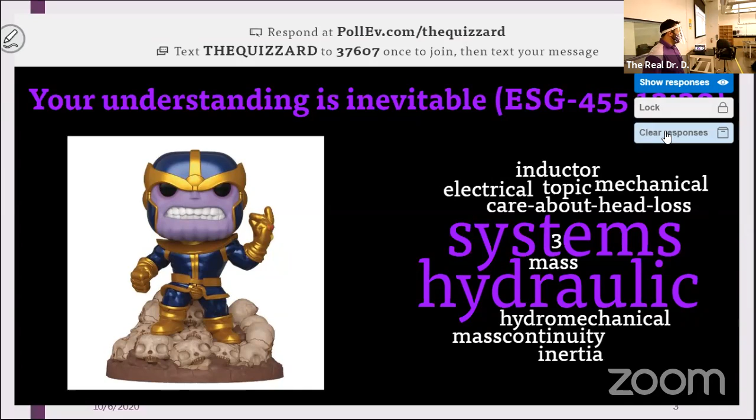Do I care about head loss? Isn't that just a change in pressure? Really, you want to talk about that? Isn't it just a change? Head loss is just how much pressure you're losing through your system - just a pressure drop. So yes, but I'm not going to call it that.

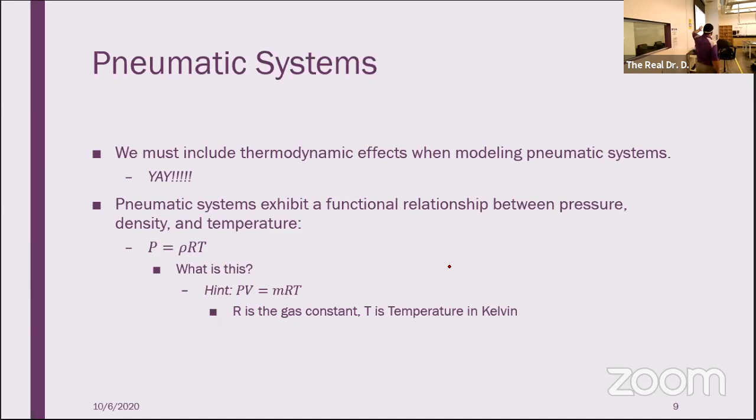Okay, so far so good. So we've got the ideal gas law, and that's going to come back and help us in a little bit. Not obviously apparent, but this is how we're going to get pressure in terms of density, or rather, our density in terms of our pressure. Because I told you before, we need to figure out what rho dot is actually in terms of something useful to us. And this is the road there, the ideal gas law.

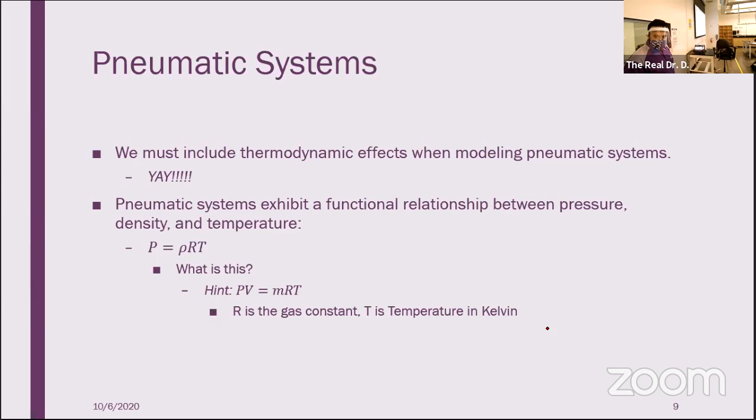So just like any other system, we have to talk about a resistance. When do we have a resistance element? The same places that we have them for hydraulic systems, specifically when we have a valve or an orifice. Now, in very rare cases, a flow of a pneumatic system can be considered incompressible, but this is going to be something that is an extremely low speed flow.

If we have a low speed flow, we can use these nice equations to deal with our resistance elements across our valves. And so we have m dot is equal to delta P over R sub L. Notice that looks a lot like our last one for hydraulic systems. Instead of being in terms of Q, it's in terms of m dot. Same deal for our turbulent.

So essentially, if this is an incompressible pneumatic system, we can treat it like an incompressible hydraulic system. Same operation. We have this, it's just that things are in terms of mass flow rate instead of Q dot. Notice we're writing all our equations in terms of m dot, because we need everything in terms of mass flow rate. The reason behind it is conservation of mass is our overarching law. If we plug these into the m dot CV equals m dot in minus m dot out equation, our job is to discern what is my mass flow rate in, what is my mass flow rate out, and what is being accumulated.

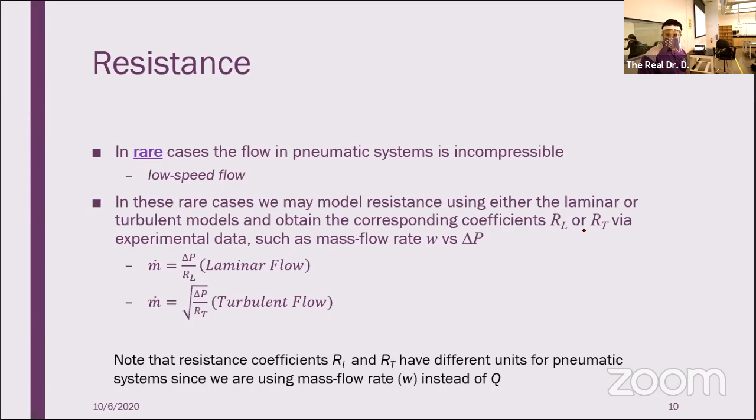So that's resistance for low speed incompressible pneumatic systems, but as it says here, that's rare and likely not the case. So how do we talk about systems we'll actually see? When we have something compressible and turbulent and complex, we need to consider choked versus unchoked flow at the minimum area, or at the throat.

So look at our picture down there - remember, that's just m dot. We've got some upstream pressure, some downstream pressure. Our m dot is moving from left to right. If we know our m dot is moving left to right, what can we assume about our pressures P1 and P2? Right, P1 is greater than P2.

It's also written there, but there's a reason. Remember, the pressure gradient drives our fluid flow. You have a larger pressure on one side, that pushes, and you lose pressure as you go across the throat, the orifice. So for unchoked flow, our mass flow rate is a function of P1, P2, the area of the throat, and temperature - the upstream temperature.

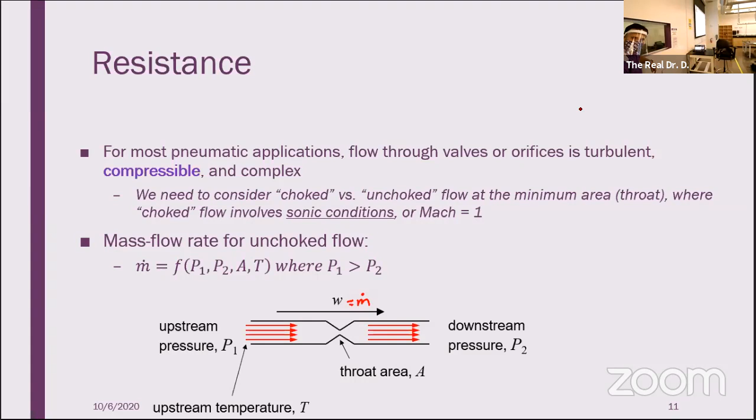That's a lot of things. So how do we - I mean, that's not just a function of the change in pressure. That's quite a bit. This is going to be complicated. So how do we go about doing this?

Well, we're going to use these equations. And they're gross, I know they're gross, but these are the ones we're going to use. So the mass flow rate - the top one is for not choked flow, or some people call it unchoked flow, and the bottom one is for choked flow.

There's a couple things we need to talk about here. First of all, C sub D - what is that? That's my drag coefficient, or discharge coefficient, whatever you want to call it. It's essentially a measure of how much friction we have in our system. Then the area of the throat times the upstream pressure.

What's gamma here? I'm not going to read this whole thing out, but what's gamma? Gamma is the ratio of specific heats - the ratio of my constant pressure specific heat to my constant volume specific heat. These are tabulated for us in a thermo textbook, table A1 or A2, which you all obviously have access to still, right?

No? So where would you find this? I think I brought this up earlier - there's this new thing, it's called Google, and you can type it in and find it. If you need one for an exam or something, good question, we'd provide one, or at least a table where you can find one. But here's my counter question: how many problems have you done thus far where you needed to put any numbers in? None. Thank you, Jeremy.

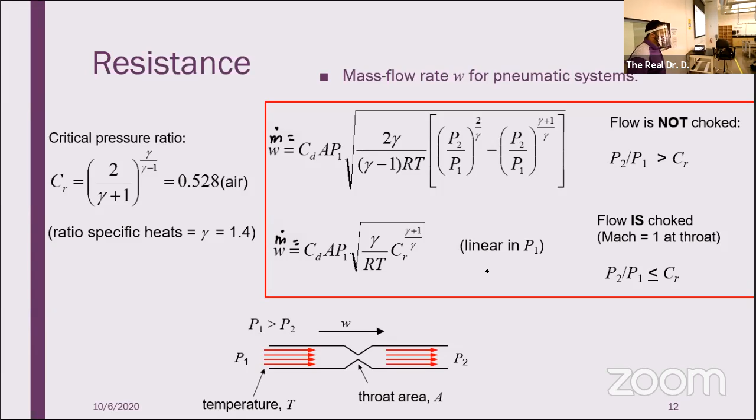Is it always appropriate to apply these? No, you don't always have to. Remember, we have things for low speed flows too, where the low speed flow will tell us that we can have either laminar or turbulent. So if you have something that's low speed, don't do this. It's not appropriate to use this on a low speed flow, but if we have something where you're expressly told that it's compressible, this is where we need to be. Do you guys have any questions on resistance?

For a compressible flow, yeah. If you have something that's incompressible, valves and things still have an effect, right? You can typically model a valve as an orifice or throat, but you need to know how far it's open, what is the area in there.

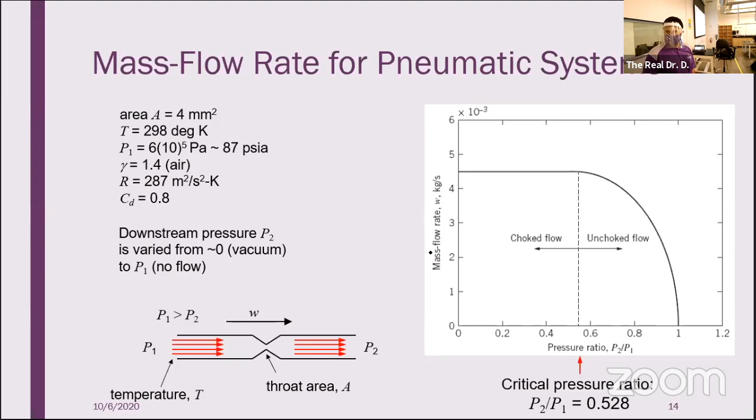All right, so let's talk about capacitance. We have pneumatic capacitance. We talked about this a little bit, right? We can define capacitance as the change dm over dp, the derivative of mass with respect to pressure.

But we know that mass is just density times volume, so we'll plug that in and massage the equation a little bit. We can find that dm is equal to d rho v, which is equal to v times d rho. So we can rewrite our capacitance as our volume times our change in density divided by the change in pressure.

Both concepts don't play here, but what does play is another thermodynamic concept. Essentially, we need to apply a polytropic expansion to this. What is a polytropic expansion? Great question.

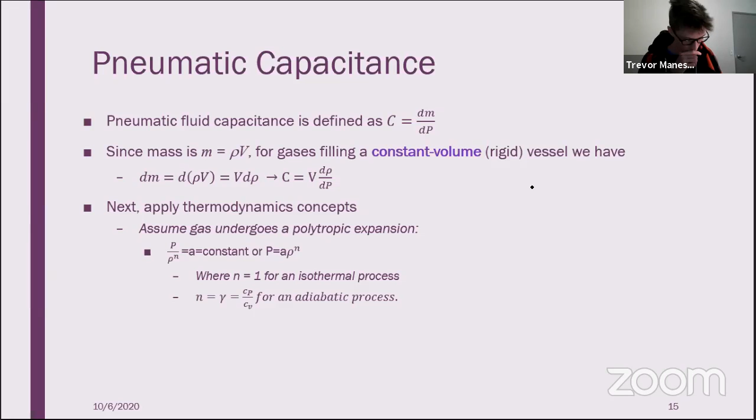All right, anyway, so we're gonna take what we know about the polytropic process and do some math. Specifically, we're gonna take the differential of both sides. Remember, P is equal to A times rho to the n. That is the equation we started with.

And we're going to take the differential of each side. If I do that, I'll get dP is equal to A n rho to the n minus 1 d rho. Then I do some algebra, so I get d rho dP. Why do I want d rho dP? Because that's what's in my capacitance equation, right? So I need to have that. I'm trying to get rid of d rho dP.

Because again, remember, as engineers, this is good practice for modeling and model making, and when we get into analytics of our models, we need to be able to measure something. If you're going to create a control system, if you're going to be controlling something using feedback, you need a measurement to come out of that. How do you reliably measure the change in density as a function of pressure? Wouldn't it be easier to just measure the volume and temperature as a function of the ideal gas constant and whatever polytropic process exponent you have?

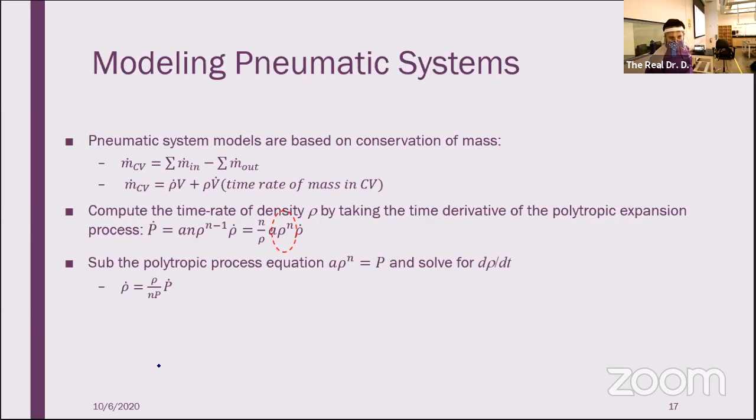Any questions on it? So what do we do? What's the point? Well, now I have an equation for P dot, right? I'm going to plug that back in, and I've got my conservation of mass.

Remember, W is M dot. So M dot inside of my control volume, the amount of mass that I'm accumulating inside of my control volume, is equal to V divided by nRT times P dot. Remember, that's C, right? This was, we just came up with this. This was C. That's C times P dot.

Plus P over RT times V dot, which we also came up with. So it's rho dot V plus rho V dot, and that's equal to my net mass flow rate, right? The sum of my mass flow rate in minus the sum of my mass flow rate out.

Yeah, so it's an M dot. I should, at some point, go back to these slides and change it, but I grabbed this one from the textbook, and I figured it'd be better to have you guys know that's what happens in the textbook in case you ever want to read the textbook, which I understand is high on everybody's priority list, for sure. Especially if you can't sleep.

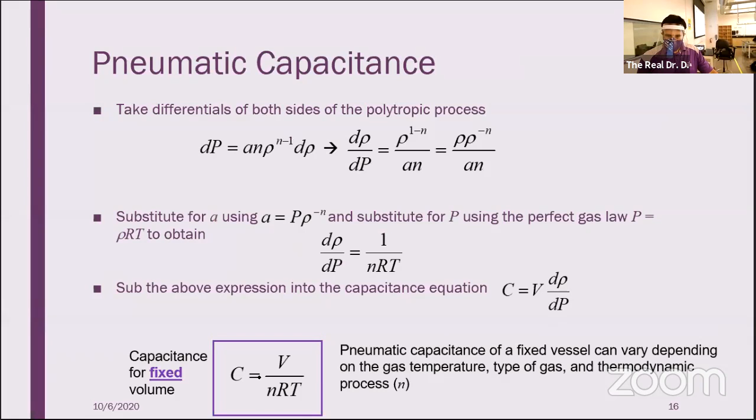Now, the other thing that we did a couple slides ago - I remember the C part. C is equal, right? So this coefficient here is actually C, which, if we think about this for a hydraulic system, we had C P dot was equal to M dot of CV, or Q of CV, right? For a hydraulic system.

That was for incompressible, right? Something that was incompressible. For a compressible fluid, we have the incompressible portion plus some extra - the compressible portion plus a little bit more. Okay, so there's that, right?

So what's this red box down here? Well, what happens? We have something similar to last class where we want to talk about a piston cylinder, right? A pneumatic mechanical system - which, I mean, we would never have engines and guns, ever - where gas is driving a mechanical output. This is something that I know never happened, but just in case it did, right?

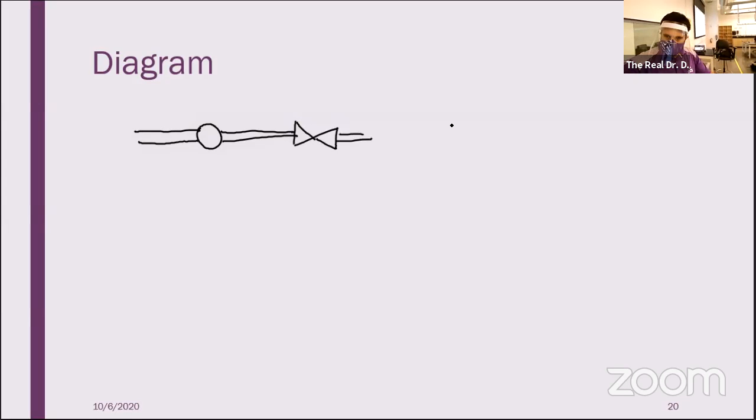The first thing we need here is a diagram. So I'm going to draw this pretty much exactly the way it was just drawn, except with the lines not being straight.

So I've got some pressure and some volume in here. I'm starting with this internal pressure here. I've got some temperature out here. I've got some atmospheric pressure there. We were told that this is R sub V. Also told that this is Q. And they call this QMI. I'm going to call it M dot I.

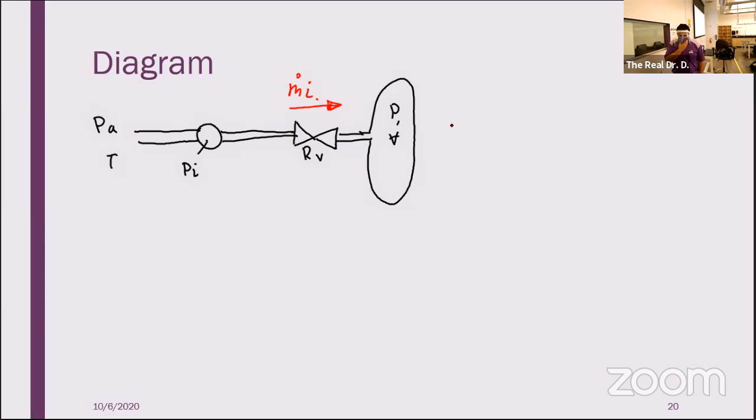Let's write that so that it actually is M dot I, my mass flow rate in. We need to draw a control volume. I'm going to use this tank.

Now, what were we told about QMI? The QMI is equal to a function of delta P. Now we don't know, it's experimentally derived, but they didn't give it. We also weren't told if this was a high speed, low speed, whatever flow, right? That seems problematic as well. Huh.

We'll talk about that in a second. What's my input and what's my output? What was that? Sorry, I can't hear. Okay.

So yes and no. If we're looking at this control volume, what are we putting into this control volume that we've drawn? M dot. Temperature? M dot I. It's the mass flow rate in. So you're not wrong, Olivia. It all depends on how much of the system that we have in our control volume specifically.

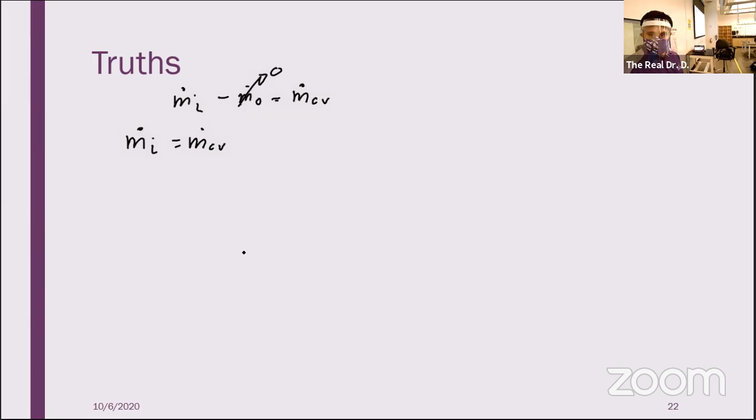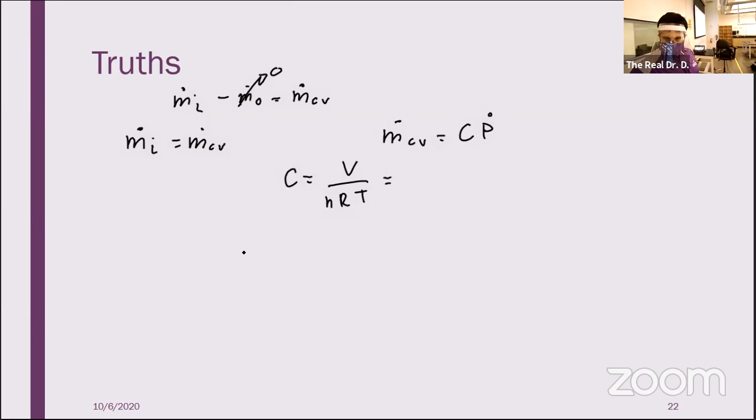Is equal to CP dot. Well, that's fun, right? We also know that C is equal to V over nRT. We derived that. But in this case, it's isothermal, so this is really V over RT, because as we said at the beginning of the problem, n is 1 for an isothermal expansion.

Okay. All right. So we can do our reduction. Where do we start our reduction here?

Well, we start with that m dot I is equal to m dot CV, right? Number, m dot I is equal to m dot CV. Well, that's just going to tell me that m dot I is equal to CV over RT, oh sorry, that's CP dot, I jumped a line, which is equal to V over RT P dot. So m dot I equal to V over RT times P dot.

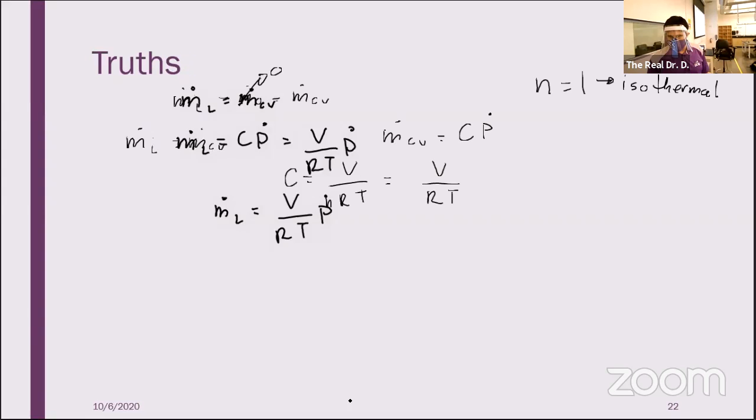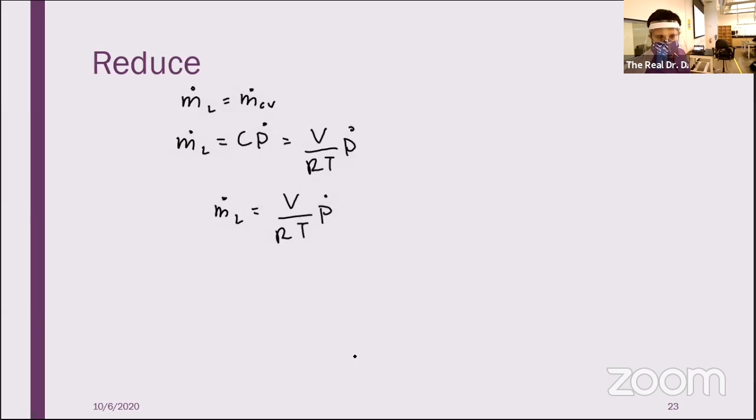So we'll go back, because we know that m dot I was equal to a function of delta P, which seems like it's unhelpful to start with, right? But this just becomes this. And there it is.

No fair, Dr. D, you picked the easy one, right? Yes and no. The only thing that makes this harder is if you have to determine choked or unchoked flow, and that's just us plugging in a different equation that we already have, right? That would be the only variation on this. Or, even easier, you're told that it's a low speed flow, so you don't even bother, you just use laminar and turbulent flow, right?

You guys have any questions on this one? Do you guys feel comfortable with some of this? Are we starting to get a little bit of this under our belts and feel a little better? Connor, go. Yes.

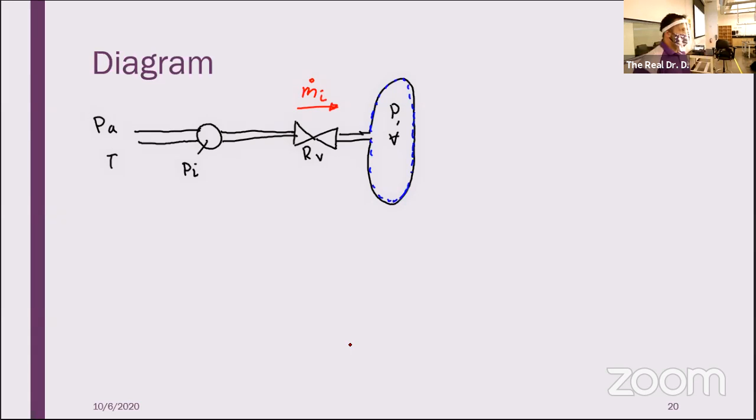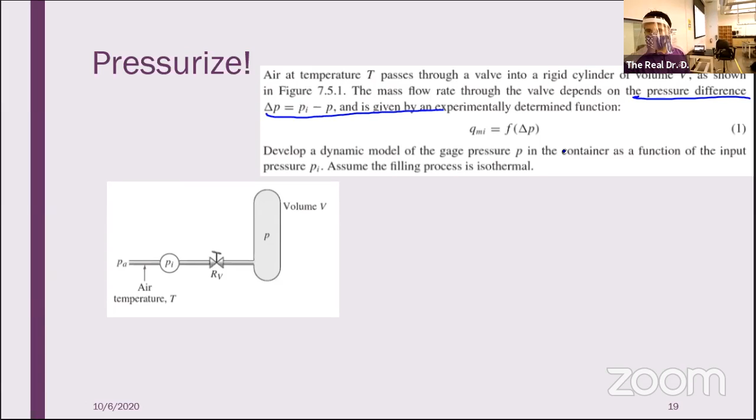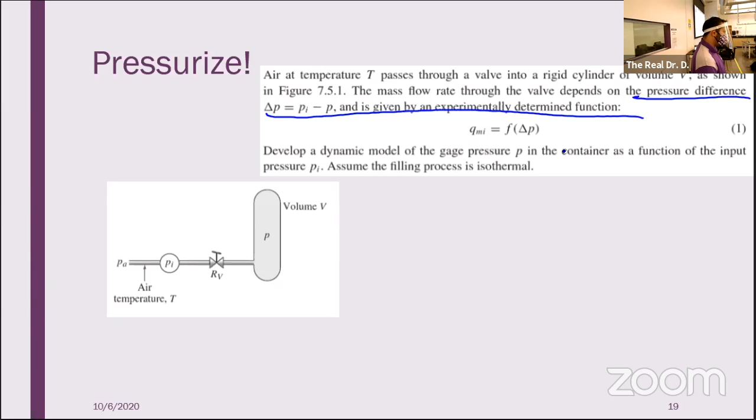Yeah. So if you go back, this is the pressure difference. Yeah. Sure.

So it comes in as that function of, remember, what is delta P? So the question was, how do we get this in terms of PI? Remember, delta P equal to PI minus P. So this is just a function of PI minus P equals V over RT P dot. And we can't really do more than that as it is because we're not told what the function of is.

Now, again, if you picked laminar, and you ran with laminar, that is a function of delta P. Delta P would be PI minus P, and you go with that. Same deal with choked and unchoked - you would be able to get P1 and P2 from that, or PI and P2. We're leaving it super general though, because you can't just assume what it is from the way that the problem's written.

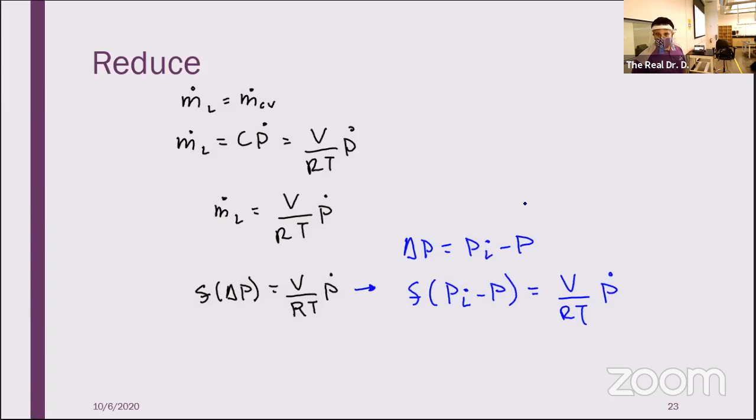All right, so let's talk about thermal systems. So with thermal systems, remember we define thermal systems as systems where temperature is a dynamic variable and we are typically interested in adding or removing heat from something. As such, instead of using conservation of mass, we're going to use conservation of energy.

So in the case of having an open thermal system, we've got some boundary that encloses our thermal capacitance. We've got heat energy that can enter and leave due to heat flow, due to heat transfer, Q. But we also have heat energy that can enter and leave due to mass transfer.

What is that? Well, remember from thermo - this is going to be very thermodynamics right now. Because remember from thermodynamics, when you have a fluid enter, it carries with it some enthalpy. And what is enthalpy? Enthalpy is mass times the specific heat times the temperature. So if we were to cut up our fluid into tiny little pieces, and we had to push that through a pipe, that's going to require some amount of energy to do so. That amount of energy is known as the enthalpy. And so we have to take into account the change in enthalpy for this.

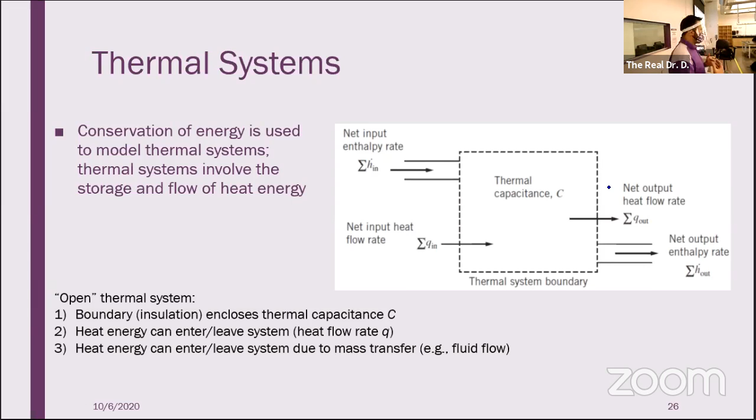So what does that look like? Well, if we apply the first law of thermodynamics, expressed as time derivatives, we get the net rate of heat energy stored, the rate of change of storage with respect to time, is equal to the sum of all my enthalpy in minus the sum of my enthalpy out plus the sum of my heat transfer in minus the sum of my heat transfer out. And this would give me units of watts or power.

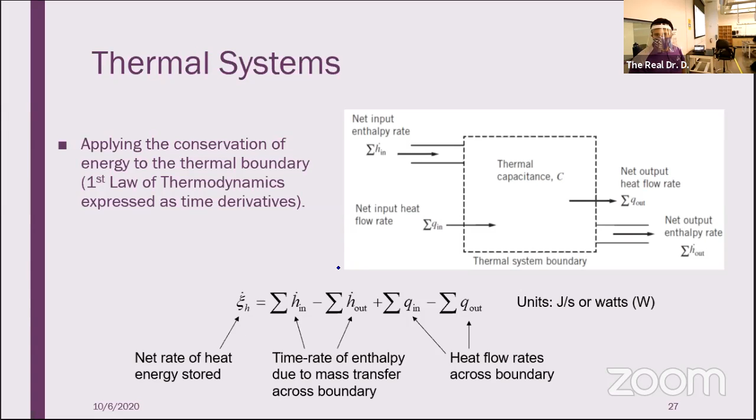In general, thermal systems are distributed. What does this mean? Well, in this room right now, we cannot consider the temperature uniform. If it says it's 72 degrees, that doesn't mean the whole room is actually 72 degrees. It's going to be hotter in some parts, colder in others.

Here's another example. I have a metal rod and I ask you to hold one end of it, and I heat up the end that I'm standing by. Eventually, it will get hot by your hand. Might take a long time, might not, depends on what metal you're holding, but eventually it'll get hot. The entire temperature of the bar is going to change according to the length. There's some temperature gradient.

Because we're talking about distributed systems, that means we need to model everything as PDEs instead of ODEs.

What did I say on day one about doing PDEs? I said no, we're not going to do PDEs. So what do we do? We just pretend they're regular ODEs, one for one. So we're going to assume that every point on an object, every point within a fluid has the same temperature, but it is an average of the temperature gradient.

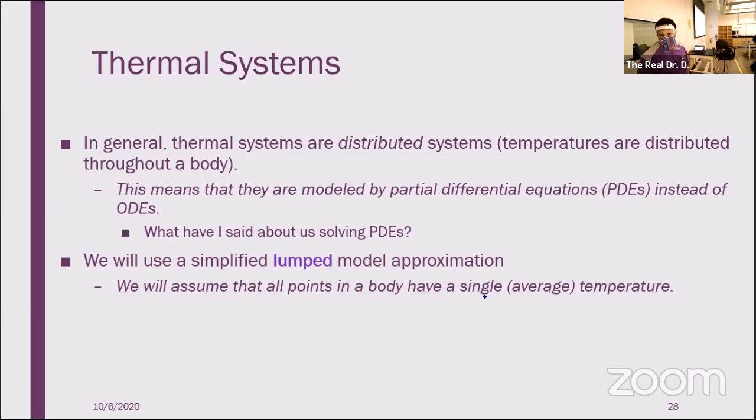We're going to be able to characterize thermal systems as two passive elements: we have resistance and capacitance. Again, we're not going to talk about inertance or inductance for this. We have resistance and we have capacitance.

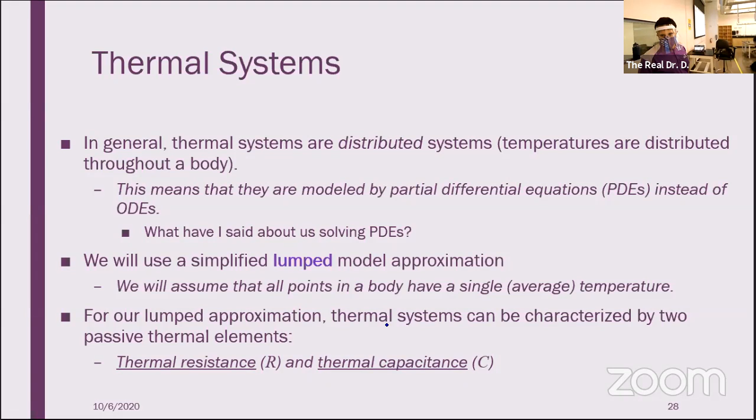Let's talk about them. Thermal resistance. What element in electrical, mechanical, and fluid systems would thermal resistance be equivalent to? Yeah, a resistor, right? Resistance is going to be resistance in fluids, it's going to be a resistor in electrical systems, it's going to be a damper in mechanical systems.

In our case, we've got three types of heat transfer that we're going to cover: conduction, convection, and radiation. And if we don't remember those, I'm going to have a long talk with Dr. Williams and Professor Tan, because that's the bare bones minimum you should have gotten out of that class. So: conduction, convection, and radiation.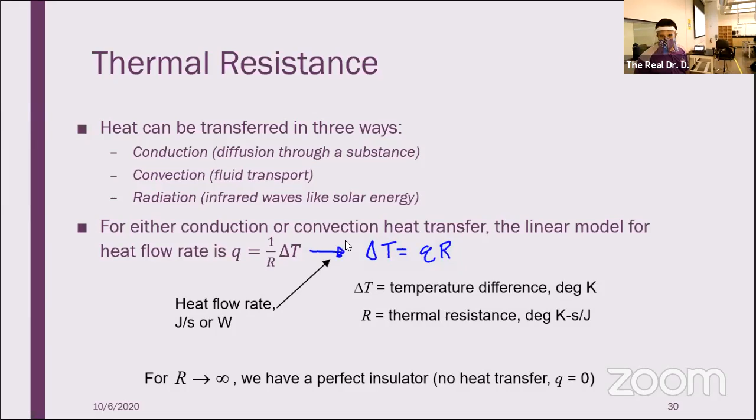For conduction, we define R as X over KA, where X is the thickness of my material, my segment. K is my thermal conductivity coefficient, and A is the cross-sectional area that I'm dealing with.

So K is a material property. For example, copper has a K value that's 18 times greater than stainless steel. So copper is a good conductor and a poor insulator. You want to be warm at night, right? You shouldn't put copper in your walls. It's not a good idea. You're just asking for trouble, really.

All right, so conduction, remember, conduction is when two things are touching. If heat transfers from things being in contact with one another, that is what conduction is. Convection, on the other hand, is when we have a fluid blowing over a surface, or two fluids passing each other.

Our convection resistance is defined as 1 over H times A. Sometimes we see that as lowercase h, which is our convection coefficient. Convection coefficient is derived experimentally, just like many of the other things that we deal with in transport and thermal. It's an empirical solution.

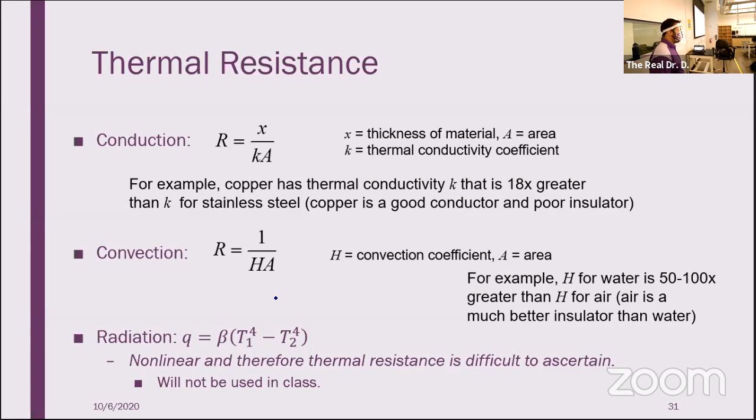All right, thermal capacitance. Thermal capacitance is the measure of a body's ability to store heat due to its mass and its thermal properties. So how much heat energy can something store? That is what our capacitance is.

We actually talked about this, well not you and I, but us as a whole, when we were in thermal, because there is a measure of this. It's the mass times the constant pressure specific heat. That is my capacitance. So how much of the material do I have, and how much energy can that material store?

For example, 1 kilogram of water has more than 4 times the thermal capacitance of 1 kilogram of air. So water can store more energy than air. Another way of thinking about it is it takes more energy to make water do something.

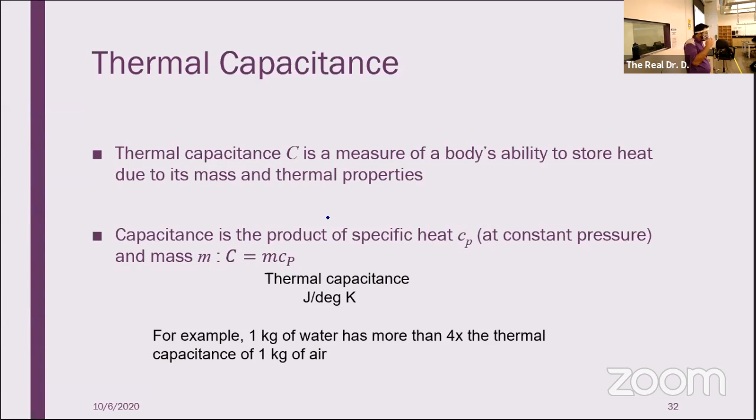Okay, so MCP, right, that's it. We've got MCP, and we've got Q equals 1 over R times delta T. But we really haven't discussed that much on how to model this. We know what the elements are, we understand what they do, but how do we actually put this into practice? The way that we're going to do that is this.

So for my lumped thermal model, we base it on a heat balance equation, which is essentially the first law of thermodynamics, but we're not incorporating any of our mechanical or electrical work here. So what do we have? We've got C dT equal to H dot net dt plus Q net dt, where H dot is equal to M dot Cp times T.

Okay, so the heat stored in the body is equal to the net heat transfer to the body, right? This is very much like M dot Cv equals M dot in minus M dot out. This is just saying that I have some energy being stored, something internal to the system, and that has to equal the amount of energy coming in minus the amount going out.

Where do we get these sources of energy from? Well, we've got C T dot, that is our capacitance term. How much energy am I storing in my material? Another way of saying this is the sum of H dot in minus the sum of H dot out, plus Q in minus Q out.

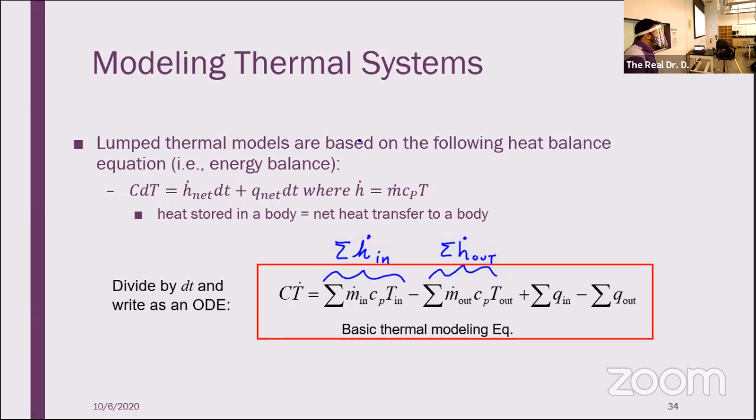What if I don't have a mass flow rate in or out? Those terms go away. What if I'm adiabatic? Admittedly, that's a really lame thermal problem, right? But if we have this equation, we can alter it based on our needs and based on what we know.

So let's try one. This is what I call a shell and tube heat exchanger, but the textbook I pulled it from calls a double pipe heat exchanger - same type of deal. We're going to use this to transfer heat from the hot fluid flowing through the tube to the surrounding cold fluid. So T1 is hotter than T2. We'll assume T2 is also hotter than the ambient temperature, TA, which isn't labeled here, but we should assume there is some ambient temperature surrounding it.

Both flows are steady, and therefore the input and output mass flow rates of the tube and shell are m.1 and m.2 respectively. We want to derive the mathematical model for the heat exchanger.

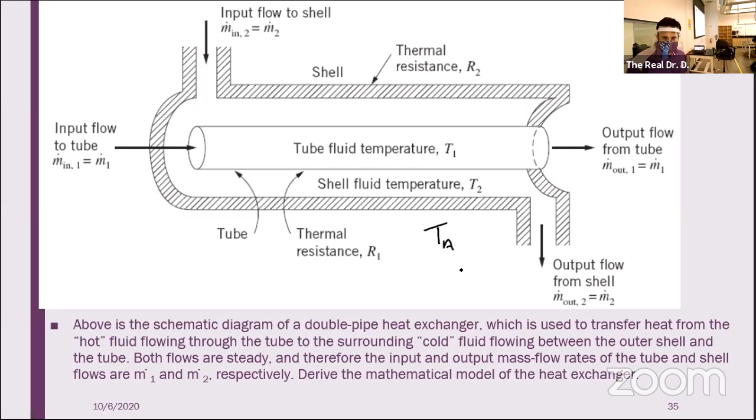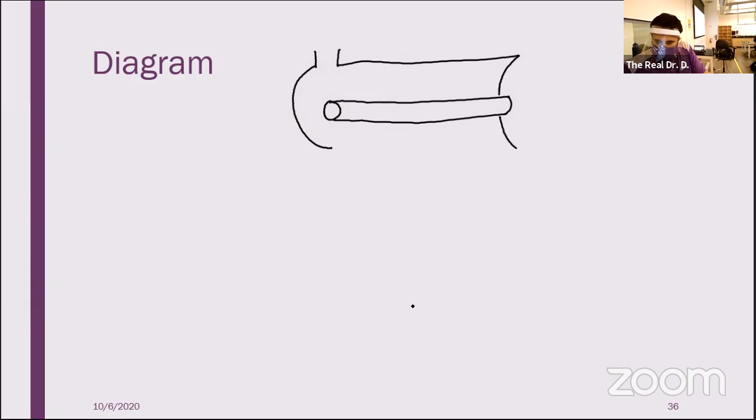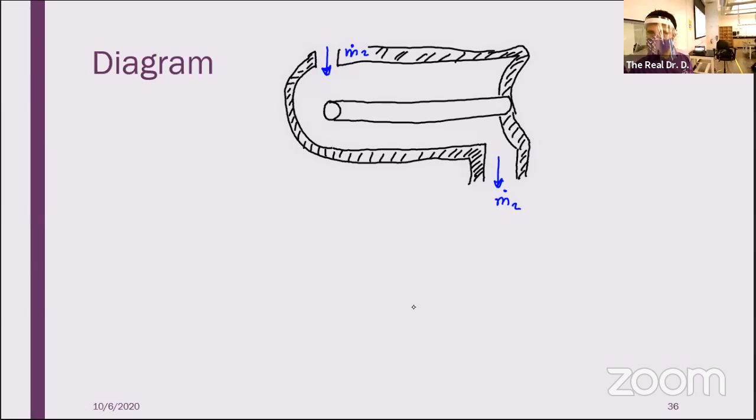So we need a diagram. I'm going to do the diagram two ways. The first one is going to look like this. I've got m.2 and m.2, and I've got m.1, m.1. I did that on purpose. The blue one signifies some colder temperature, which we're calling T2. The red one is T1.

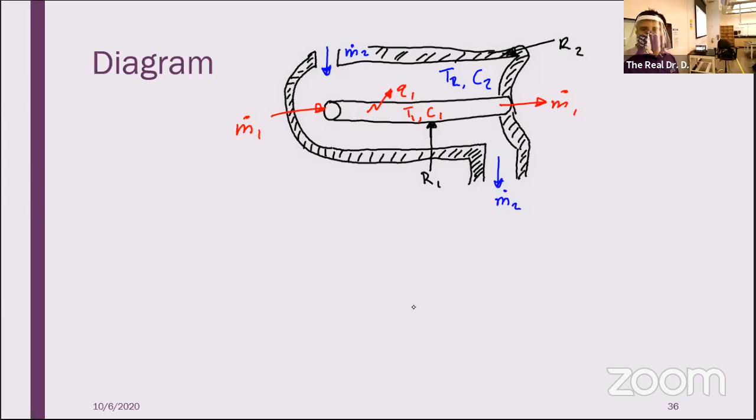The diagram also calls out the thermal resistance R1 and the thermal resistance R2. We've got some capacitance in here, C2, and some capacitance in here, C1. There's also heat transfer - call that Q1, from the hot pipe to the cold fluid. And I've got some heat transfer called Q2, from the cold pipe to the outside, because remember, I've assumed the ambient temperature is less than what the cold fluid is working at.

And that'll do it - that's a good one. But I told you I was going to do this two ways. The other way is I'm going to define my control volumes. I'm going to say this is my tube, and this is my shell. I'm going to define this as m.2, this is m.2, this is m.1, m.1.

I'm going to have Q1 across here, Q2 here. Remember, this wall has some R2, and this wall in here - these two things are connected - this is R1. Inside, I've got C1, T1, and C2, T2. Either one of these is fine and valid and used.

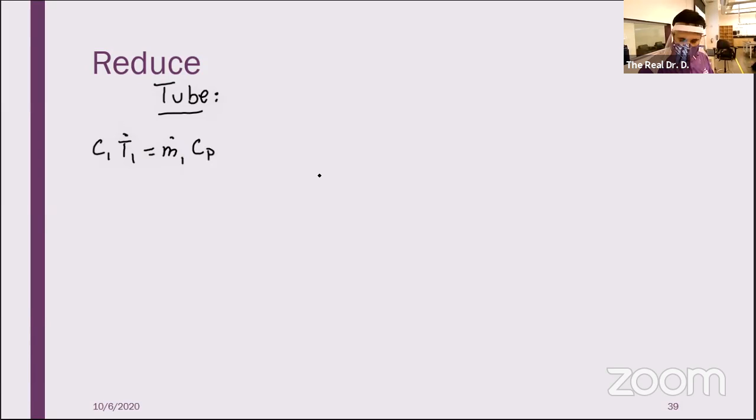So that was C1 T dot 1, and that's going to equal M dot 1 CP T in 1 minus M dot 1 CP T out 1.

So I know it says T1 on the heat exchanger, but because of the way that this is going to operate, the temperature entering and the temperature exiting that heat exchanger have to be different. I'm exchanging heat, I'm losing temperature with the hot fluid, and I'm gaining temperature in the cold fluid. So we can't just say that T in is T1 and T out is T1, because otherwise this whole part of the equation is zero.

No, because remember, it's the same M dot. It's a single inlet, single outlet. Good question—the question was, are the M dots supposed to be different in and out? And they're not, because it's one inlet, one outlet for each of our tube and shell.

So I know it's not explicitly stated anywhere that T in will be different than T out, but if they are in fact the same, this whole part of the model goes to zero, and we haven't exchanged any heat, which is problematic. Well, I guess not true—we wouldn't technically have not exchanged any heat. It just means we've exchanged such a small amount that it didn't change the temperature.

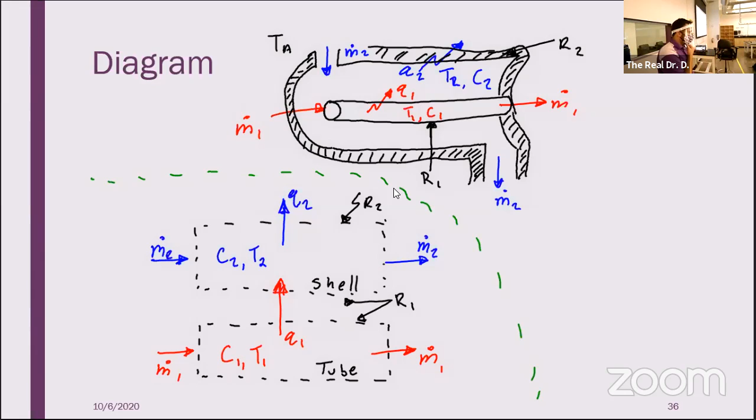How much do I have leaving? Q1. Exactly. So plus 0 in, minus Q1 in.

So we can add some things in here. Instead of minus Q1, let's make that thermal resistance 1, T1 minus T2, because that's just 1 over R delta T. So I've got this.

And we can rewrite this. Okay, so where did I get 0 minus Q1? Remember, this is the sum of my Q in, and this is the sum of my Q out. So if we're looking just at the central tube, I have no heat transfer coming in, I only have heat transfer leaving, which was Q1.

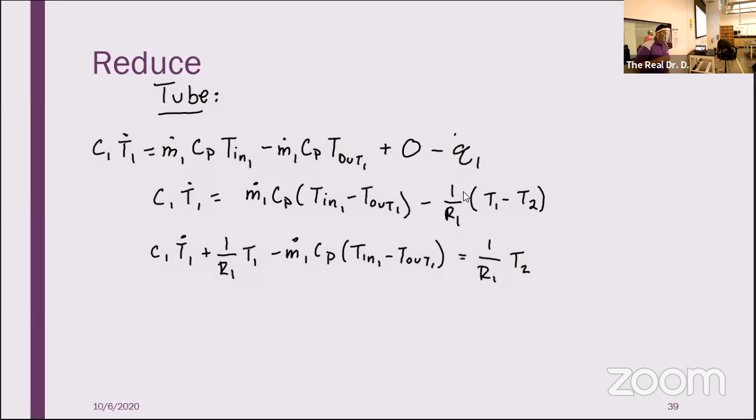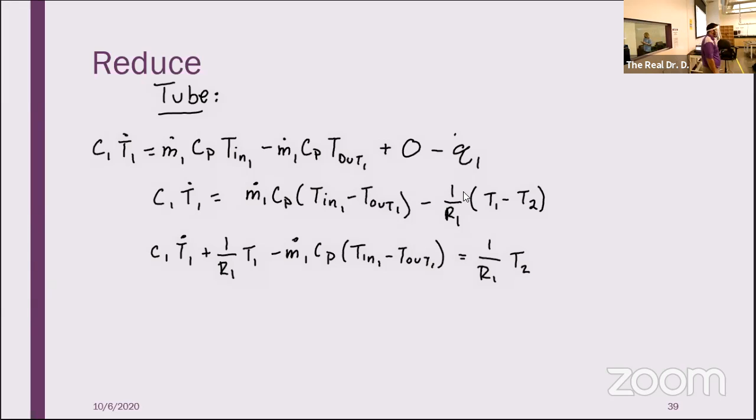So we're going to do the same thing on the shell side. Remember, the inlet and the outlet have their own temperatures, but the average temperature inside is still T1 and T2. We're still lumping those, but you can't ignore the fact that the inlet and the exit are going to have different temperatures. Otherwise there's no reason to do this problem, because this just goes to zero.

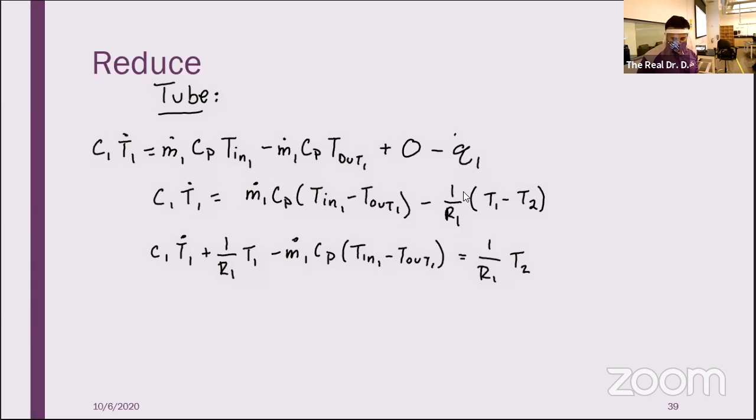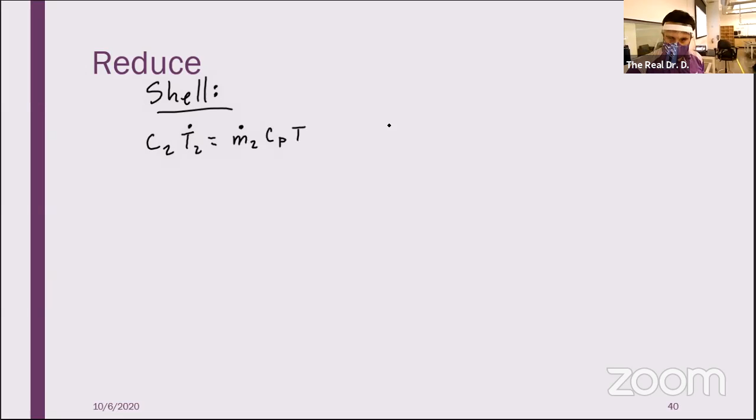So now we're going to do C2 and T dot 2. Now we can move to the shell. So we have C2 T dot 2, and that's going to equal: M dot 2 CP2 T2 in minus M dot 2 CP2 T2 out, plus how much heat transfer do I have coming in? Q1. Q1 minus Q2.

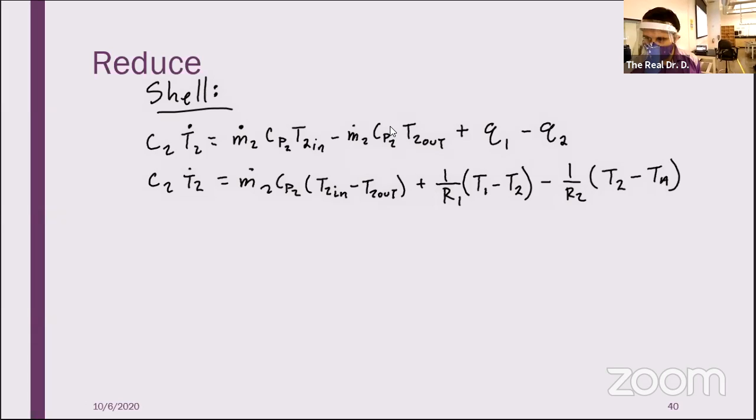All right, we'll make some substitutions, do some simplification as we go. We get this. We can algebra.

Does it matter which side you put the ambient temperature on? No. Constant, doesn't matter, whichever side you want.

Just to clarify, the two T's, T1 and T2, are the difference of T in and T out, right? Yes. So the question was about the temperature gradient associated with the heat transfer portion. You need the temperature in minus the temperature out, so the temperature on the left side of the Q minus the temperature that you have on the output side, the right side. Okay.

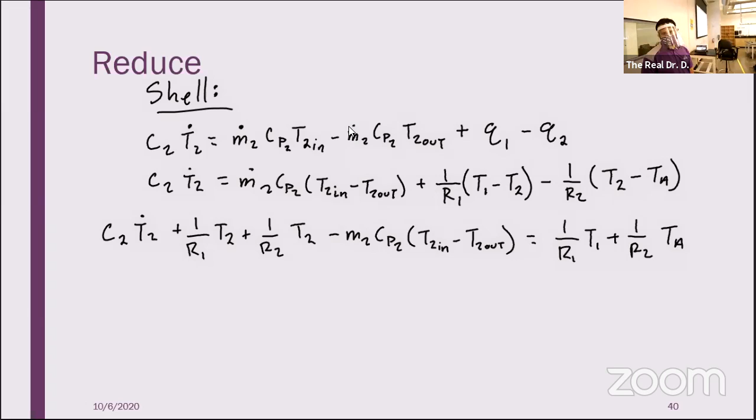All right, I've got one more, and this one's a little bit different. So I've got a wall here. It's made up of brick, fiberglass, and sheetrock. There's some temperature outside. I've got some convection heat transfer coefficient on the outside and the inside, and I know what my conduction coefficients are.

We'll do this assuming that there is a capacitance for each section of wall, meaning that the wall is going to actually absorb a certain amount of energy, it's going to store some energy in it. So how are we going to do that? I'm fairly confident that you guys have seen resistance modeling of walls in transport, it's a very common technique. So what do we do? We've got to draw our picture.

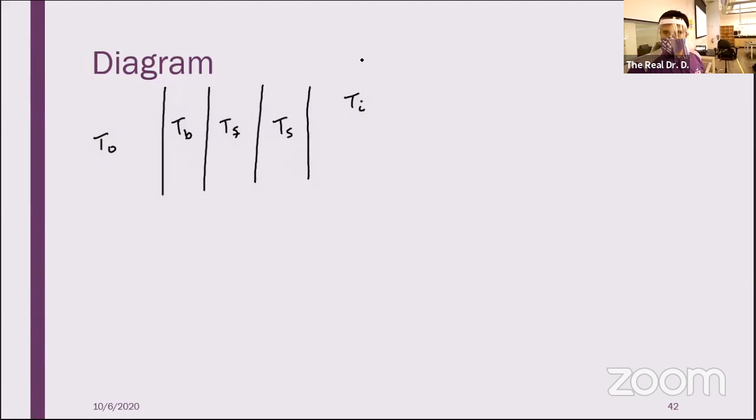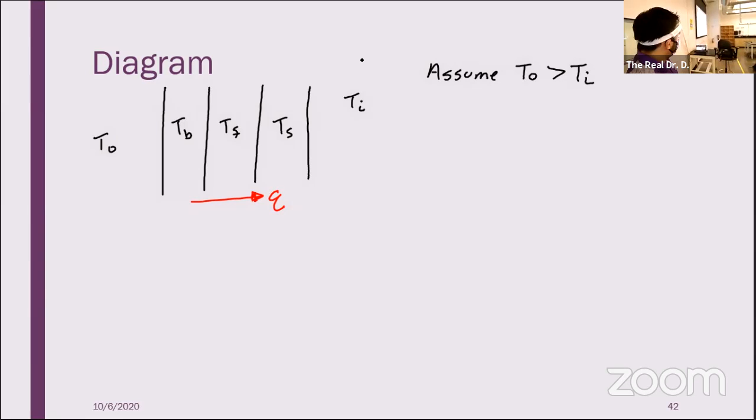What do I have? I've got this wall, it's got 3 sections. Here's my outside temperature, here's my inside temperature. I've got some brick, I've got some fiberglass, and I've got some sheetrock. I'm going to assume that my heat transfer goes from the outside to the inside, so I'm assuming that T out is greater than T in.

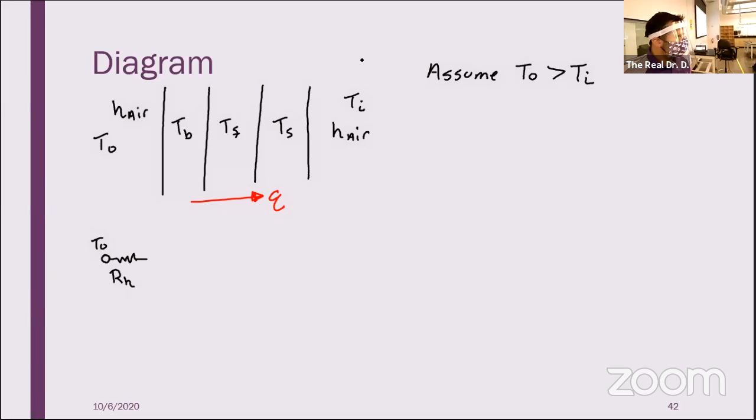I can also draw this in a different way that will make it look like a circuit. Remember, there was some H air here, some H air there. That's important because it lets us know that there's convection we have to model on the outer surfaces of the wall. So if I wanted to draw this as a circuit relationship, I would start with T outside. Then I'm going to have to go through R sub H, some convective resistance that I'm going through. Then I'm going to hit the wall.

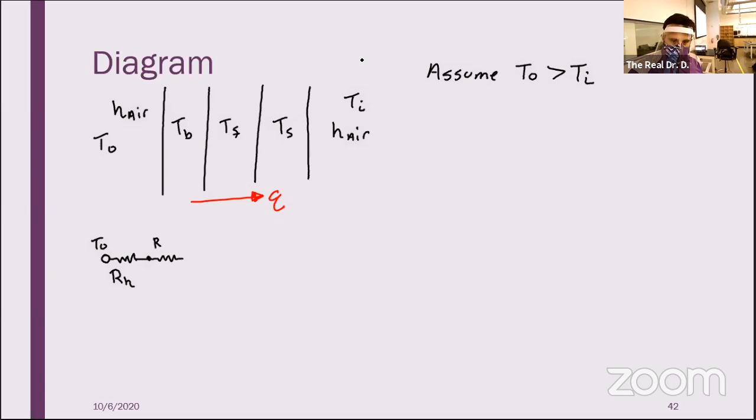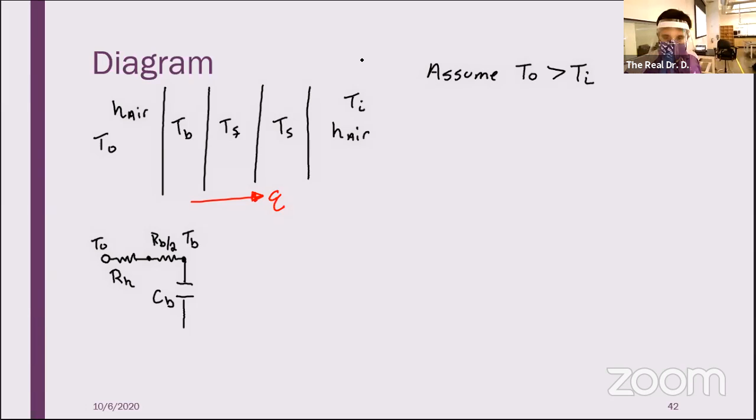And once I hit the wall, I'm going to go through half of my brick resistance. Then I get to the middle, and the middle is where I'm going to say the temperature of the wall, the temperature of the brick, is T sub B. And this is storing some energy, C sub B, so I have a capacitance. Coming out, I've got RB over 2 directly into R sub F over 2. That's going to get to the middle of the wall, middle of the fiberglass. I have a capacitance.

I think you guys pick it up, right?

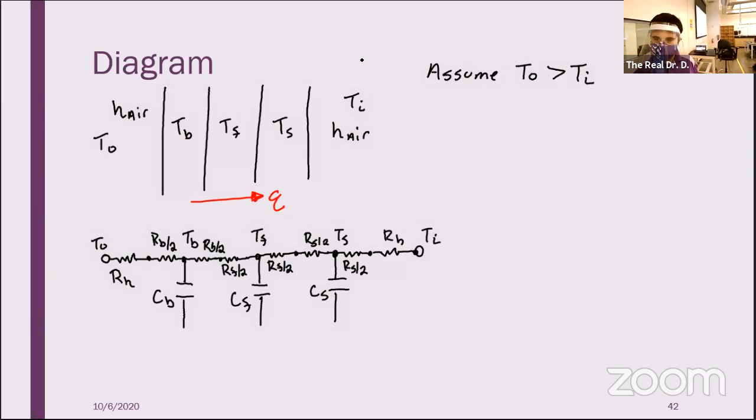That's RH, and it's really this. So I can create this as a circuit model, right? So why is that the resistance over 2? Well, because it's half the distance. Remember, the conduction resistance is determined by the length we're traveling through. So it's literally half the total resistance.

What if we didn't have capacitances here? What if I said, you know what, we're just going to ignore capacitance. What would we have? Well, you would just have something that looks like that.

We'll do that there. You can't call them TB, you have to call them T1, T2, T3, T4, because now you have to track the temperature at each of the junctions. You need the surface temperature of the wall, the temperature between the brick and the fiberglass, and the temperature between the fiberglass and the sheetrock, and the temperature between the sheetrock and the surface wall. So there's quite a bit more.

Yeah, Chris, why are we considering the resistivity of the air? Because there's some convection heat transfer going on there. So basically, if we go back here, the big giveaway is that in the diagram, we were given H sub air, and we were given a value for it. Is there always convection heat transfer going on in a house at all times? No, right? The wind isn't constantly blowing all the time.

I'm sure. I mean, this is a very specific thing, but you want to run a model like this both ways, because in the off chance that the wind is blowing, which is, I know, crazy talk, right? But if the wind does blow, we want to know how that affects our heat transfer.

This problem is mostly about trying to understand how much heat is getting shifted into the home, so we know what the maximum cooling load is. We want to know, okay, I am inputting 100 joules of heat transfer into this house, I need to size an appropriate cooling load based on how much I want to cool it. So another way of thinking about this is, if it is in fact 120 degrees outside and you want your home to be 70 degrees, how much energy do you need to make that happen?

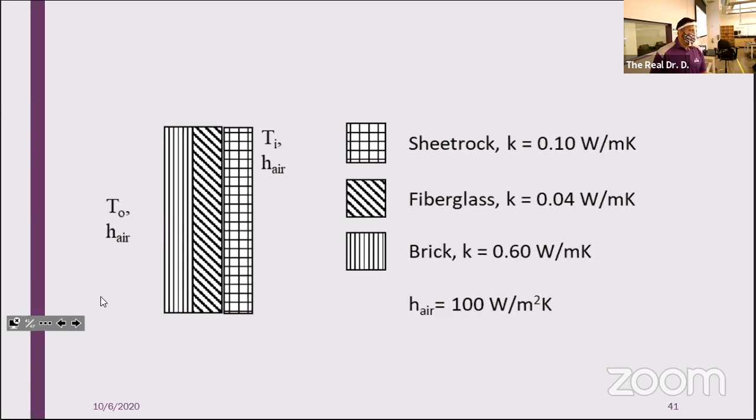Okay. So what do we do here?

Apparently my voice got deeper. Let's try. Hold on, please hold, please hold. Is that better? Worse? Is it worse? Is it high pitch now? Thank you. Too bad, I was hoping it'd be high pitched.

Anyway, what are my inputs and outputs for this? What's driving this system? What am I interested in getting? My input is my external temperature, and my output is my internal temperature. Why? Well, the output's simple, right? I want to know how cold I can get the inside to be, or hot, whatever you want to do. Remember, we're not running an HVAC in this. We're just trying to determine the amount of heat transfer that happens based off of the capacitances that we have and the external temperature driving this because it's higher than the internal.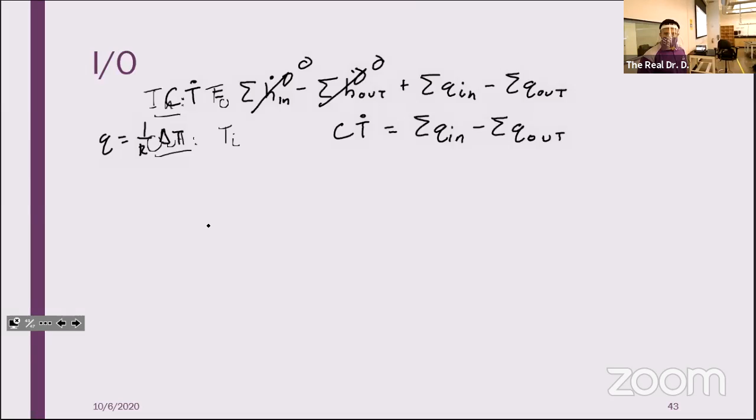Sean is correct. What we are going to do is look back at our circuit diagram, and essentially we're going to use KCL at each of these nodes. I know how much heat transfer I have.

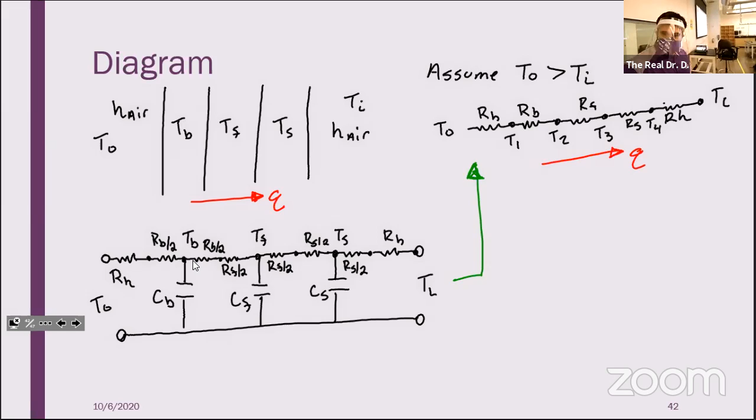Let's call it this, right? Let's highlight these right here, and right there. I know how much heat transfer I have going into the red dot and how much I have leaving the red dot. I know how much I have going into the blue dot and leaving the blue dot and the green dot, right? So I should be able to write one equation for each of those. And look, I've got a nice capacitance here as well.

Another way of thinking about this, if you don't like to think about it as KCL, is conservation of energy, right? We just wrote the equation: C T dot is equal to the sum of my Q coming in minus the sum of my Q leaving. So what's happening here? I put some heat transfer in, some of it gets stored in my capacitance, and some of it leaves.

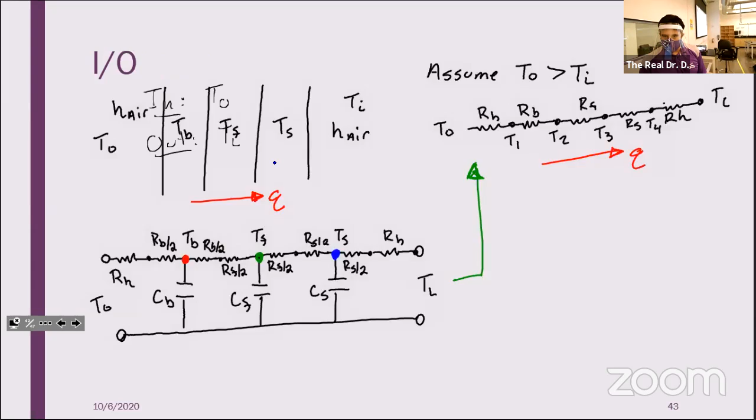So let's start it up with that red one. So would you want us to write the KCL equation with the truth still, or just go straight to reduction? You don't need to write the KCLs down. You can just do the reduction from there because we wrote down the big dog equation here.

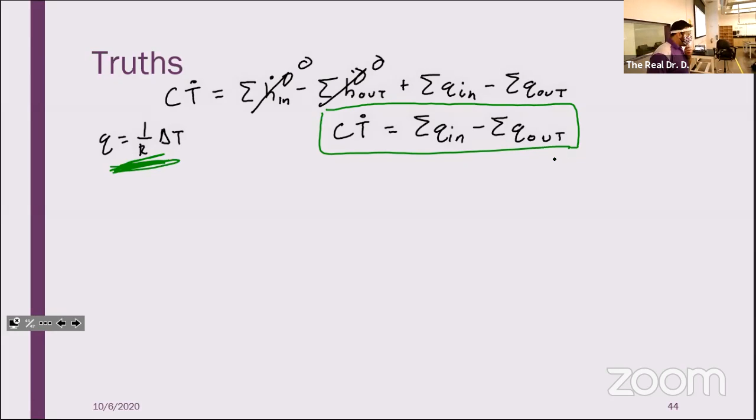This is the equation that we are going to evaluate at every single one of those nodes, and we're going to substitute in this for Q. Those two equations are all that we need to do this model.

So what do we do, right? Well, let's start with the red one. So I didn't name it properly. Well, what do I have? Let's go back and look. What do I have here? What's my Q in? Well, that's just gonna be those two resistors, they're in series, right?

Can't I combine these? Call that R1, R2, R3. How do we combine resistors in series? Just add them. So I'm going to write those as R1, R2, R3, and R4 because I don't want to rewrite RH plus RB over 2.

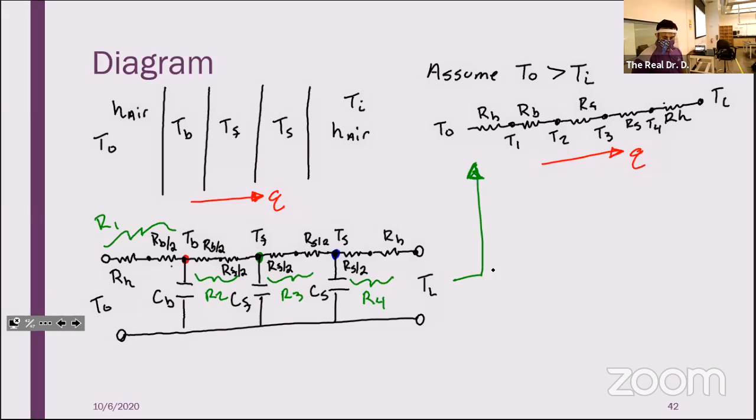Right? So what do I have coming in to the red node? Well, I've got the heat transfer due to me crossing these resistors, which is going to be 1 over R delta T. That's going to be T out minus TB. What do I have coming out? Well, I've got 1 over R2 times TB minus TF, and I've got CT dot coming in, or being that's staying.

So: 1 over R1, T out minus TB. CB, let's call it, TB dot is equal to that—that's my heat transfer coming in—subtract my heat transfer leaving: TB minus TF.

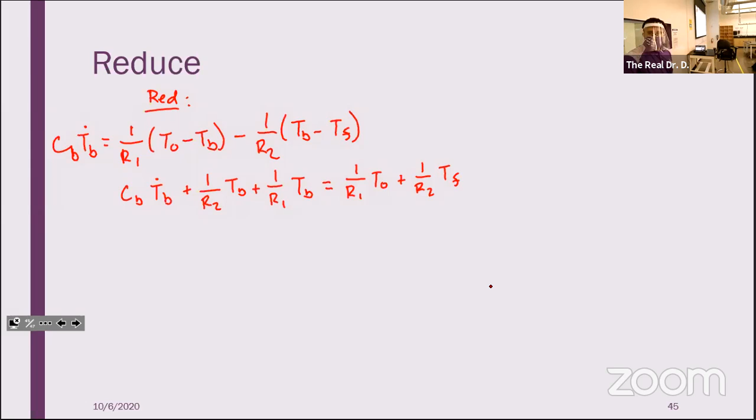What about the fiberglass? Remember, these are linked, right? So the output heat transfer from the brick is the input to the fiberglass. So I have that. What's my output heat transfer? 1 over R3, TF minus TS.

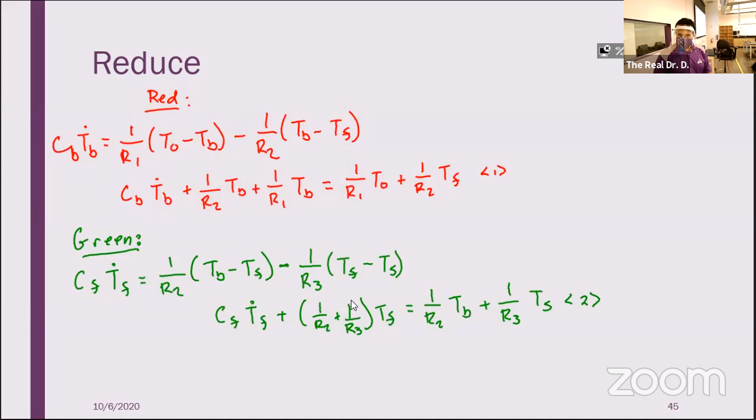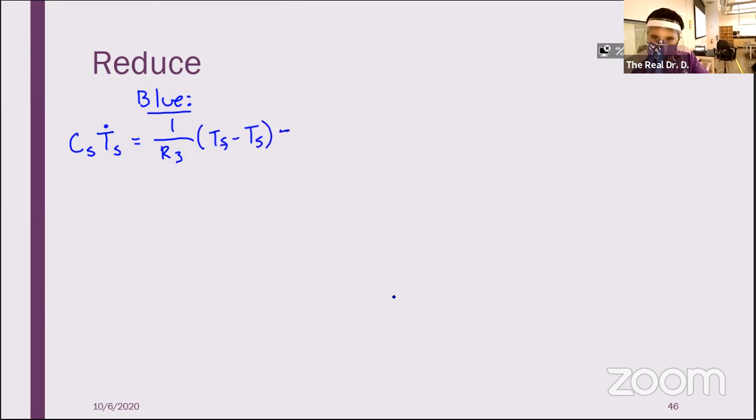For the blue node, I've got my sheetrock. I'll make sure I write this down right. Remember, it's going to be the output from the other one: 1 over R3, TF minus TS. And what do I have leaving? Well, I've got 1 over R4, TS minus T in. And now I've chained everything all the way down the line, right? Each one of these is in terms of the other.

These are all coupled together. And because of that, if you really wanted to, you could chain this all the way back. You could solve this one for TF, plug that into the TF equation, then solve that one for TB, plug that into the TB equation, and you'd have something that is T out in terms of TI. You'd be able to tell me how the outside temperature affects the inside temperature. That's how you'd be able to do it.

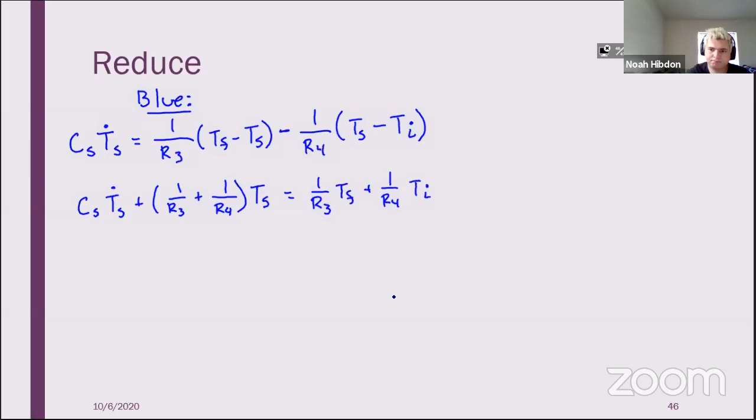What if the heat transfer was going in the opposite direction? What if it was hotter inside than it was outside? I know, nobody's used to that in these parts. Yeah, all your signs would flip. That's it, all your signs would flip.

You guys have any questions on this? Will you ever ask us to chain all those together? Not for now, we're getting there. We are hurtling towards that point very quickly. So the question was, will I ever ask you to chain them together? Not on an exam. Once we get to Laplace transforms, there is utility in it, but you'll see when we get to state space, you want them as systems of first order differential equations. It's going to make life a lot easier.

You guys have any other questions on these problems? These are really the two flavors of heat transfer type problems that we have. You've got heat exchangers, and you've got basically resistance type problems. The homework has both kinds.

If nobody has any questions about anything else, you can ask me a question about anything otherwise that you want. Blake: does the exam cover material all the way up until today? The exam does cover everything till that last sentence I just said, not including this sentence. Mark it in your notebook.